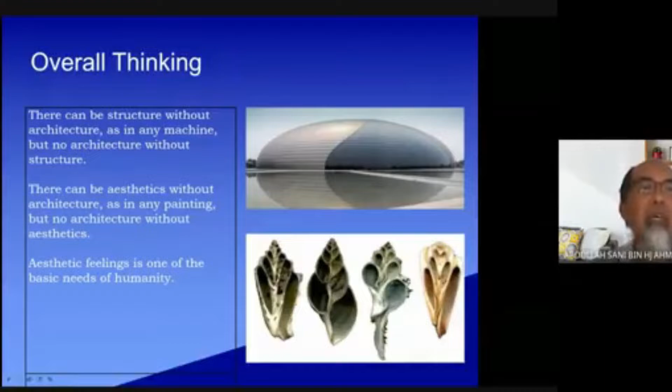So there can be aesthetic without architecture. As in many paintings, there is a lot of aesthetic in it, but no architecture. We see beautiful things, aesthetic things in plants, in views. Okay, those are beautiful things, those are aesthetic, but there is no architecture.

Aesthetic feeling is one of the basic needs of humanity. So in architecture, one of the things we have to have in mind is aesthetic. And structure is part of architecture. We cannot neglect structure because, as I said earlier, without structure, a building cannot stand. And when we design, we have to think about the structure.

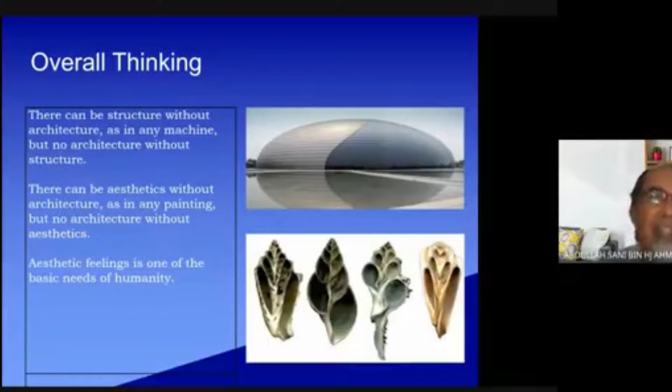So when architecture incorporates structure in our building, we have to incorporate not only structure, we have to incorporate beauty, we have to incorporate aesthetic, something that is beautiful. So I hope students can understand the overall thinking about structure in architecture - it's not just structure, but it's more than that. Okay, next please.

Okay, when we use structure for architecture, basically the structure can be divided into 2 components - this is just to recap the whole concept of structure. There are 2 types of structure: one is load-bearing structure, the other one is skeleton structure. Okay students, you have to remember these 2 types of structure.

What is load-bearing structure? Load-bearing structure is basically when we put material on top of each other without any frame inside it. So from the slide here, you can see how termites build their nest from mud - they just build on top of each other. Okay, you see the Prambanan architecture in Jogja, the one on the top right hand picture.

That is Prambanan. If you remember, Borobudur is also load-bearing structure. Load-bearing structure is when you place material at the bottom and then stack it up to the top. Different from RC frame structure, where there is reinforcement inside the structure. Load-bearing uses the material itself as its structure. Okay, this is load-bearing structure.

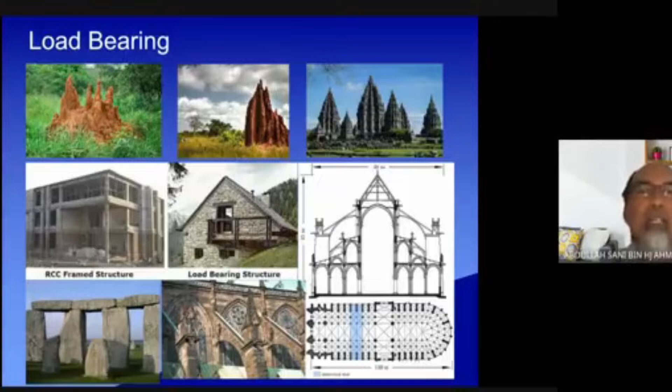Next slide please. Okay, another example of load-bearing structures from previous architects, great ancient buildings - you can see the Colosseum here. These are all great examples of load-bearing structure. I think the most famous one until now is the pyramid, which is load-bearing structure.

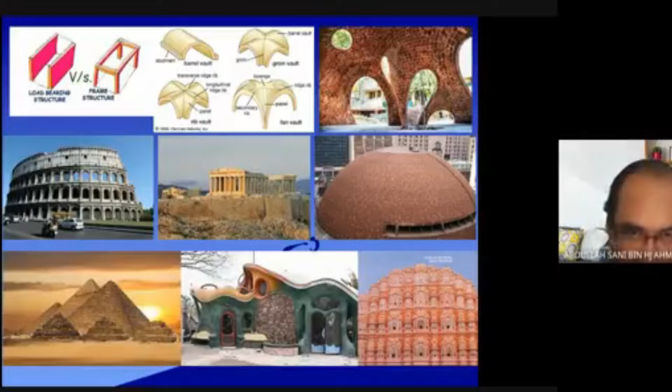Also, in recent buildings, you can find many still using load-bearing structure. As I said just now, in load-bearing structure, if you push the material, you cannot see anything inside - it's just the material on top of each other. What I mean is there's no reinforcement inside. They just use the weight of the material to make the structure.

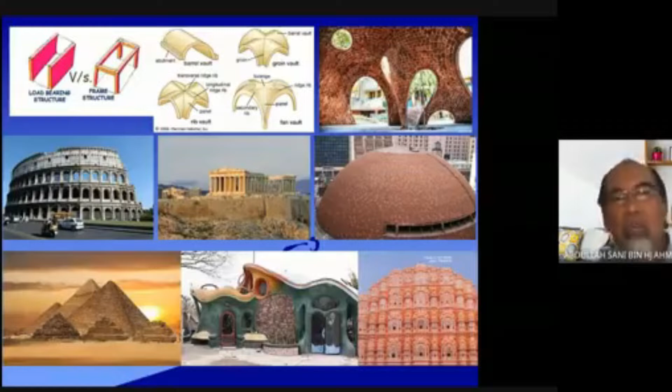Okay, there are many forms. Actually, if you are creative, you can make curvilinear shapes, you can make a dome, you can make fancy shapes of architecture, like for example barrel vault, dome, pyramid, and curvilinear forms. So actually, load-bearing - we mustn't say it limits our creativity, because if you have ideas, you can do many kinds of architecture. Next, please.

Okay, that one is load-bearing architecture and load-bearing structure. The next one is a skeleton structure, or in other words, post and beam structure.

Post and beam structure can be found early in timber building. It's very easy to understand: we just put two posts, and on top of the posts there is a beam. That is what we call post and beam.

If you have a lot of these frames, post and beam, for the entire building, we can call it skeleton structure. There are many examples in the world, in Malaysia as well. If you go to Sri Menanti, you can see the 4-story Istana Sri Menanti using post and beam timber structure. If you go to Kuala Kangsar, the Istana was also built using skeleton structure.

If you go to Scandinavia, there are a lot of houses using timber or skeleton structure. In London, there is one famous commercial building, more than 5 stories, situated near Oxford Street. They call it the Liberty Building. The entire building was made using timber skeletal structure.

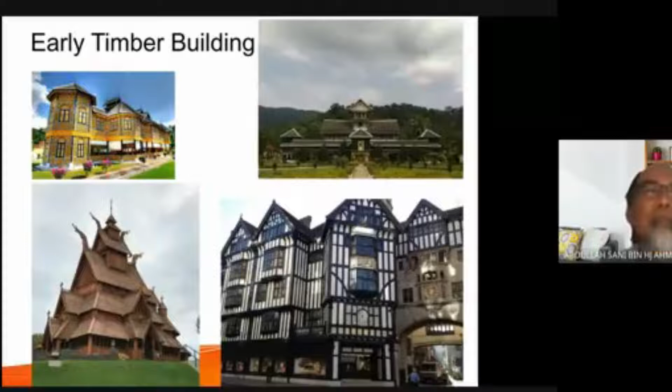Next, please. Okay, this is quite modern. As I said, an architect should have creativity, should innovate the understanding of structure, either load bearing or skeleton. These are some examples of skeleton structure for contemporary architecture.

You can find a lot on the internet, whether it is a proposal or a real building. The one that I showed here is a real building. So I think by now you can appreciate what skeleton structure is, and what load-bearing structure is.

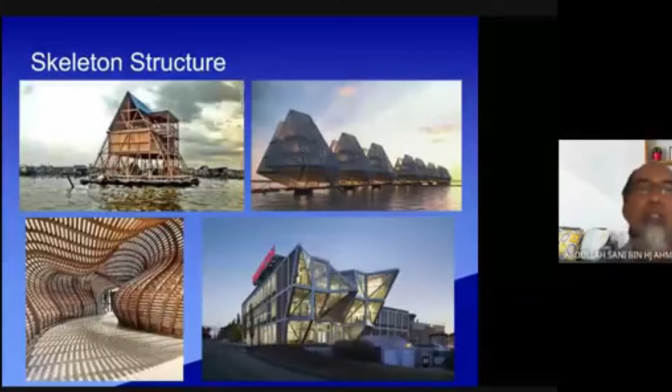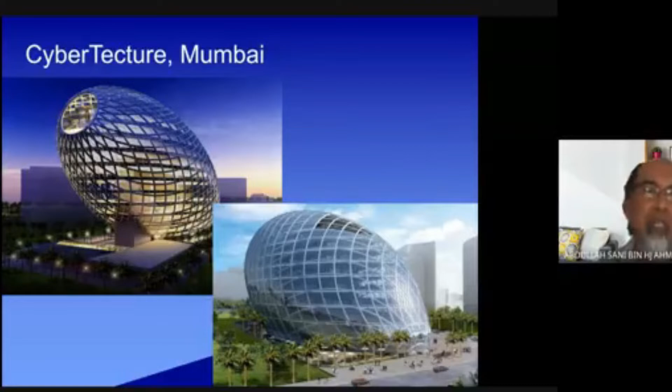Another example, but this is not from timber, this is from steel: the CyberTecture in Mumbai. I think if I ask students what kind of structure they use, straight away you'd say this is skeleton structure. This is not load bearing.

Okay, come to this topic today, the expressive structures. My dear students, as I said, if you know the concept of structure and you want to integrate it in your architecture, you mustn't let the structure just serve its function.

That is to support the floor, to span a distance, maybe to protect from the environment. I think you have to go more than that. You have to use structure as architecture, and you can express the structure. So here are some examples of structure whereby they express in terms of beauty.

One example that people know is the Bird's Nest Stadium, opened in 2008 during the Olympics. You can see they depict the bird's nest and use it as a stadium. And the Golden Gate Bridge in San Francisco is one of the landmarks in the US. It's a nice bridge, not only to span a river, but also as a landmark.

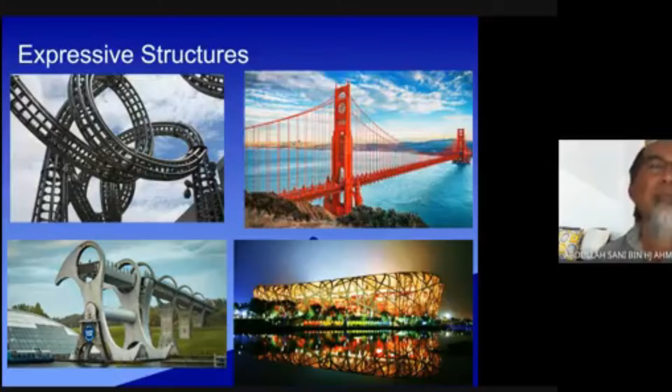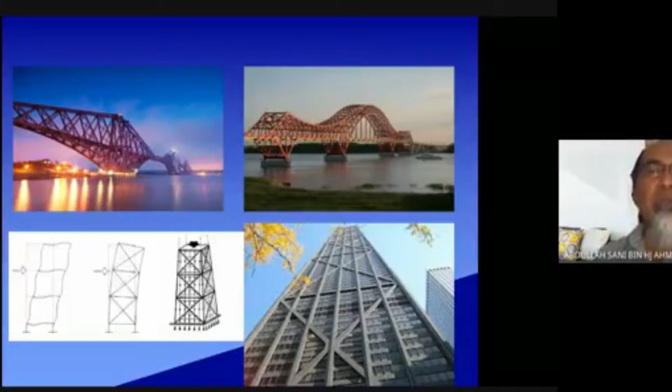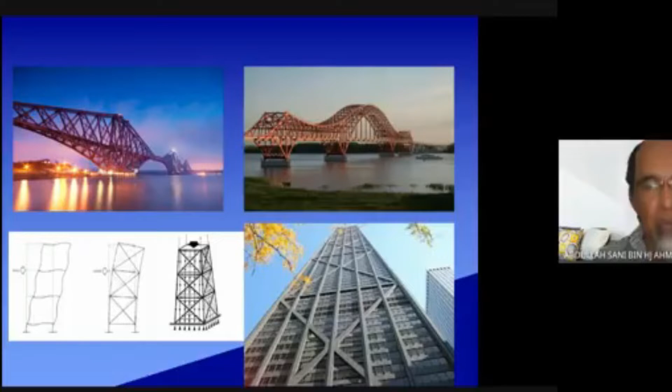Okay, next please. Another example of how you use the structure to express your idea. So whether it is a bridge, a building, a tower, a reservoir, a retaining wall, any structure actually, if you incorporate aesthetic, it becomes more expressive.

I think everyone has stopped by at the R&R Ayer Keroh or Sungai Buloh. There is a bridge connecting to the other R&R. The connecting bridge is just a bridge, and inside the bridge, inside the Warren truss or whatever truss, they use the space for a restaurant.

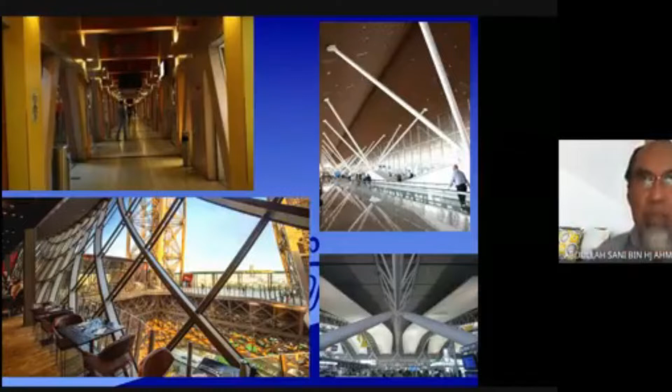So you have to remember, whether it is a column, a beam, or roof trusses, actually within the column, within the beam, within the trusses, there is space inside it, and you can use the space, exaggerate it by looking at the structure, and it becomes more meaningful. Okay, here are some examples.

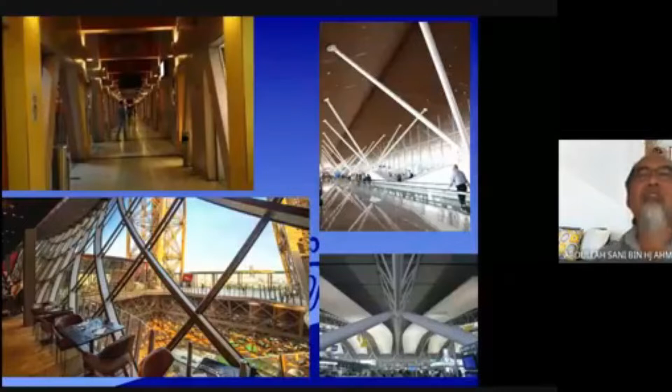What I mean by, you can use the space inside the structures.

My dear student, if you want to grasp the whole idea of structures, there are two components: vertical structure and horizontal structure. Vertical structures are normally columns, horizontal structures are normally beams or floors. In between them are diagonal structures. If a diagonal structure is more than 45 degrees, it becomes a vertical structure; if less, it becomes more like a horizontal structure. So if you want to remember, structure has only two components: vertical and horizontal.

Okay, this is for skeleton structure. But for load bearing structure, this idea doesn't apply.

So Frank Gehry, for the Bilbao building, used this idea of vertical and horizontal structure to make the building not ordinary, because he understood that structure is not only vertical or horizontal, but you can use diagonal structure as well. If you use all three components of structure, it becomes different from ordinary structure, and it is more expressive.

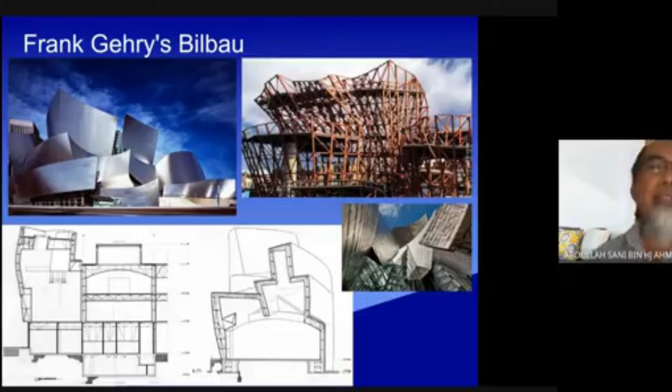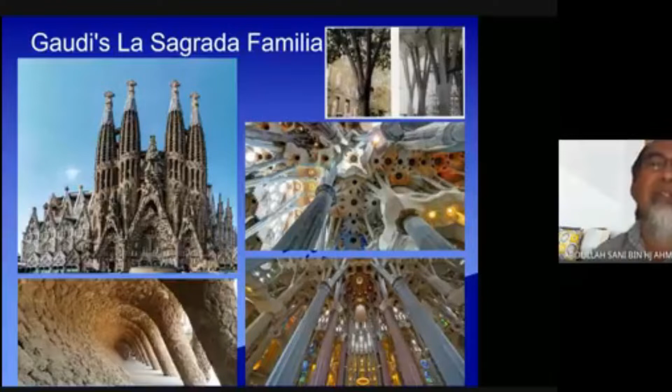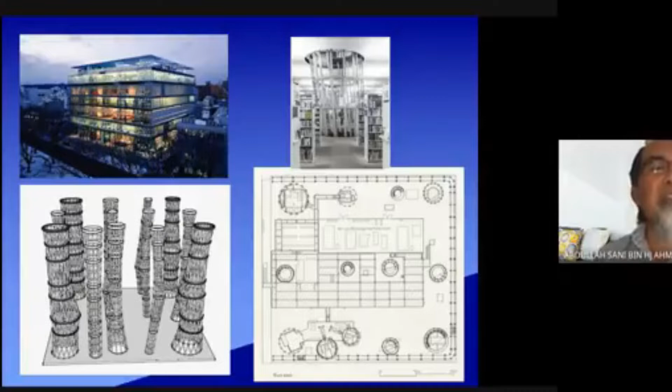From that idea, you can see that the column is not necessarily solid. You can expose the column to become a character of the building, or use the hollow section within the column to integrate with services - you can put a lift inside it, a staircase, and many other service functions. So you can integrate services together with your structure, and integrate aesthetics together with the vertical structure. This is applied in Sendai Library in Japan.

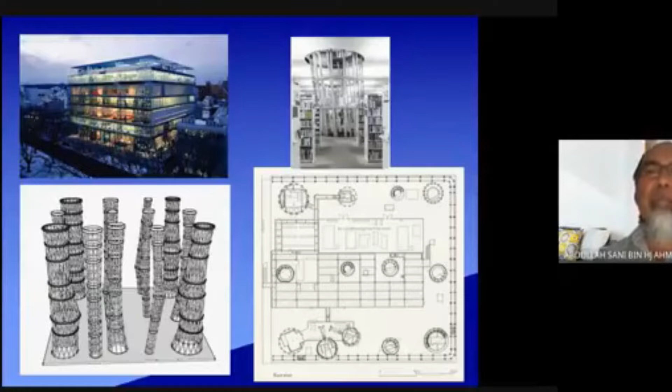Next, this is how the concept of the building looks like. Can you see this? The column is a skeleton column, not a solid column. And also the floor is just like a waffle floor, so that it is lighter, not solid.

The column is not solid, even the floor is not solid as well. This is so that the building can go higher with less weight supported by the column.

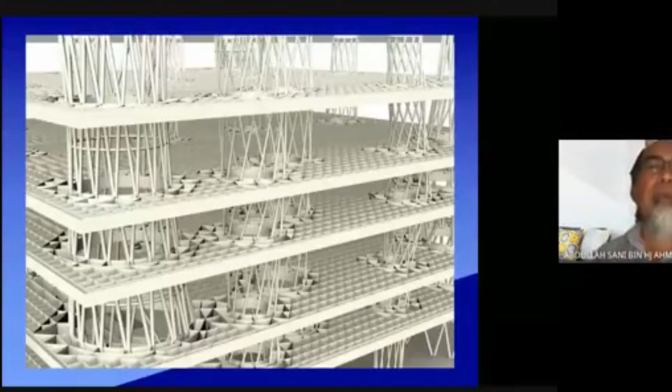From different analysis, because the architect used computer experiments to test the idea, I think the idea works, and the building in Sendai, you can see it works nicely.

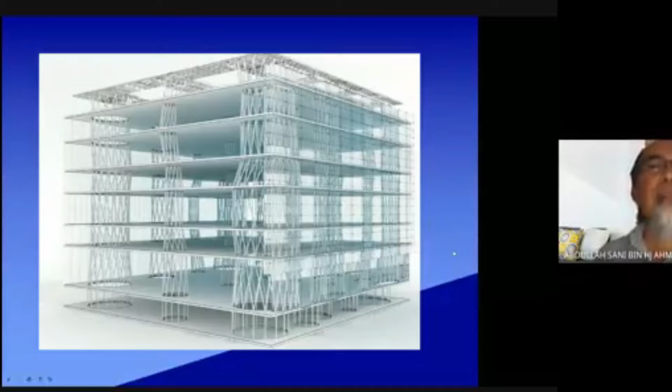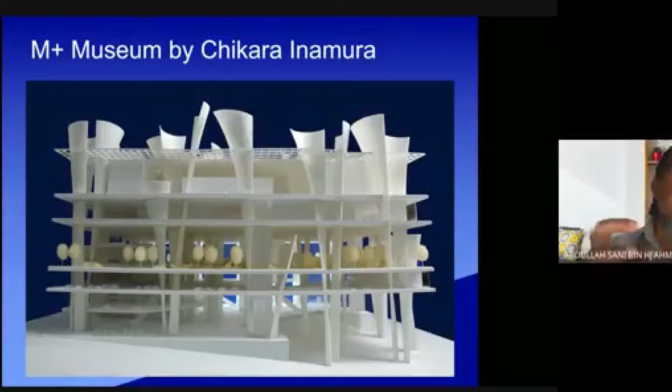I'm not very sure about this one, whether it has been built or is still an idea, but from the Sendai architecture just now, this has the same idea. Can you see the column - instead of a skeleton column, this one uses a folded column.

Folded column to support all the floors, and it becomes nice - another piece of architecture. So again, my dear student, you can express the column in many ways. In the past, Roman architecture used Doric and Corinthian columns, but now if you understand more than that, you can use skeleton columns, folded columns like this one, and many others, or you can even use a branch. Later I will show some examples to represent and express the column, not only as a solid column.

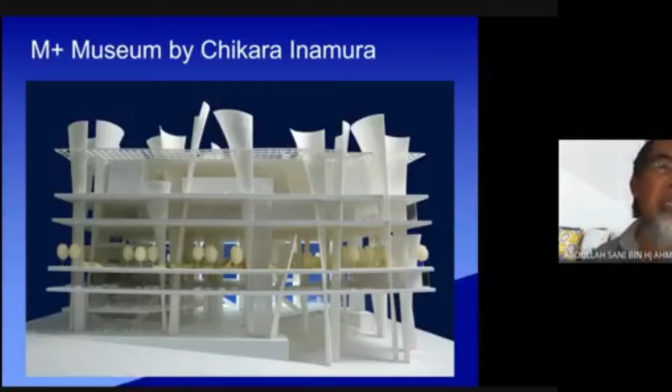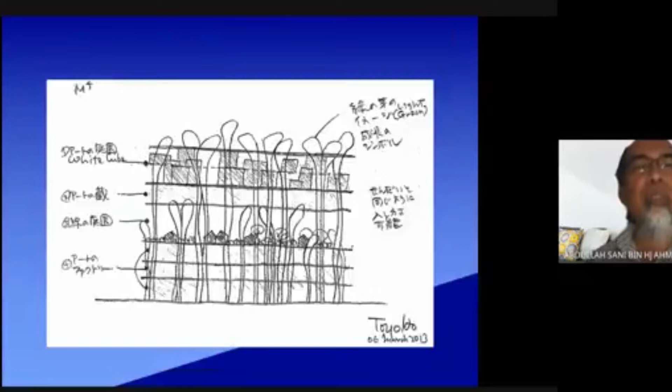Okay, this is just the sketch, the initial idea, how the whole concept of the building wants to be built. Okay, just the column, nice column, and then they put the horizontal things. Okay, next, please.

Okay, nowadays we have a lot of computer applications available. We can sit together with the computer engineer, or we can sit together with the engineer to build our architecture. And can you see, if we can reduce the solidness of the column, actually we can reduce the weight of the building. And if we reduce the weight of the building, actually we save some cost of the building, as well as when we reduce the weight of the building, the building can go higher. So there are many advantages of reducing the weight.

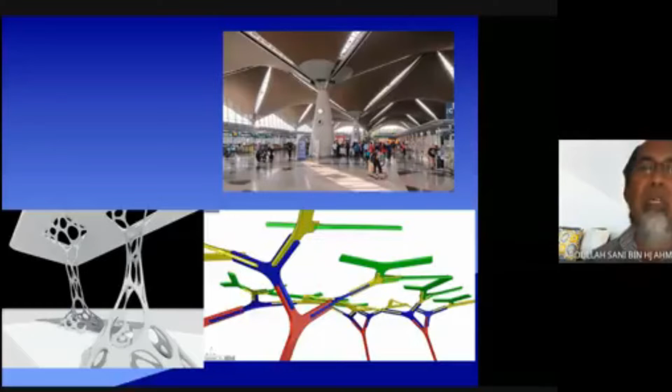Okay, that's why nowadays there are many crazy ideas, expressive structures around, because of the availability of computer applications. Next. Okay, this is what I mean. Zaha Hadid used a lot of computer applications to realize her idea.

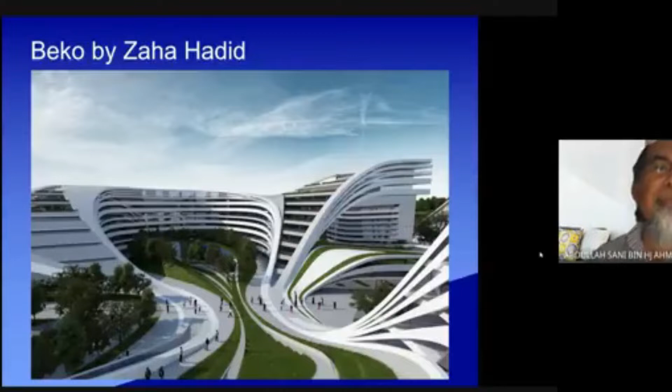Okay, next. Another expressive structure by Zaha Hadid from a different building. She expresses bukan setakat vertical and horizontal, tapi combine between the two lah. Next, please.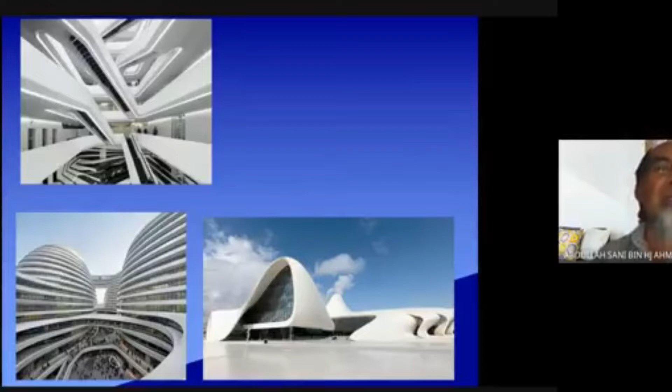Okay, this one. I think if you have time, if students are interested to know about this verticality and horizontality, where there's no differentiation between horizontal or vertical, you can study Zaha Hadid, because Zaha Hadid likes to use lines in her architecture. So she applies structure into architecture, not architecture into structure.

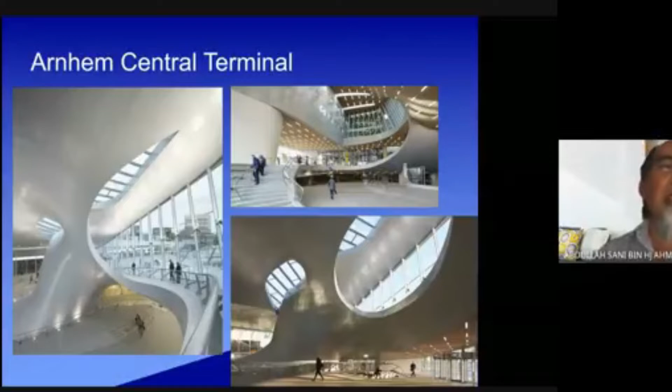Okay, from this understanding, you can apply to terminal, you can apply to museum, you can even apply to a small building or a shelter, bus stand, and many more. Okay, next please.

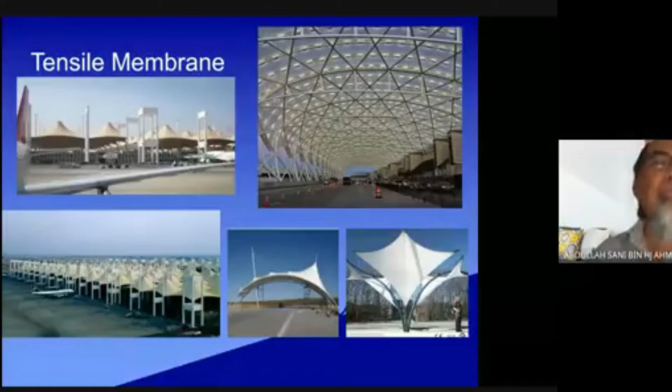Okay, another great architect that likes to express structure, I think you can use as a reference, is Santiago Calatrava. Santiago Calatrava is a person yang seangkatan dengan Richard Rogers, Norman Foster, semua lah. So he expressed the structures. Like for example, if he wants to use a column, he tries to elaborate the column. If he designs a bridge, he makes sure the bridge looks nice and becomes iconic to that place, becomes a landmark to that place.

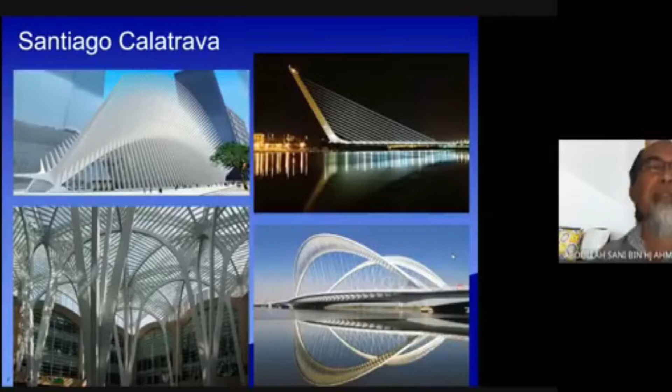And I tell you, student, if you incorporate the aesthetic into architecture, your architecture becomes more meaningful. Okay, next please. All right, these are a few more examples of expressive structure, whether you want to design a pedestrian bridge, or a multi-purpose hall, terminal, mosque, and many more.

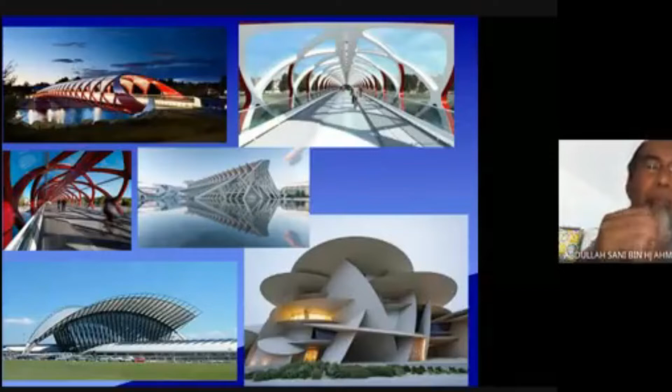Actually, if you have an idea, you can express the structure that you use. So again, my dear student, I don't want you to design only space, nice form, but neglect the component of structure whereby you can express it at the same time. And again, when you design architecture, when you design a building, the building comes together with structure, with interior, with landscape. So if you have time, please produce your architecture as a package, not just a space and form, and you forgot about how to express the structure.

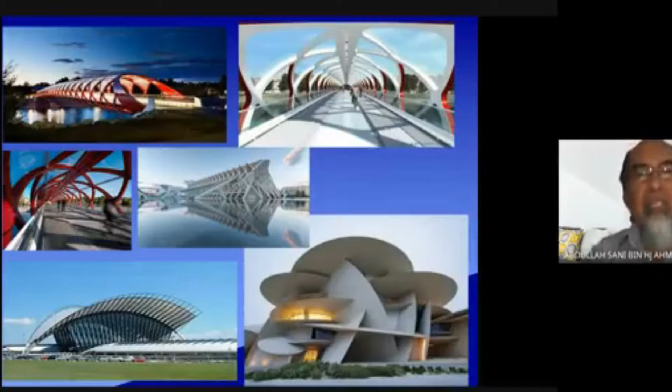And also you forgot to put some nice element of landscape, especially in front of the building, as well as the interior, maybe the lobby, maybe the living room, put some nice interior architecture in it. If you combine all these things, architecture, landscape, interior, I believe your architecture has more meaning, has more quality, and you understand the whole architecture. Because architecture is everything. Everything is architecture. Next, please.

Okay, this one is still in progress, not built yet. Mumbai Convention Center. Can you see here? Where is the column? You can't see the column. Where is the floor? You can't see the floor. But they combine the whole thing, and it becomes something where people come and see, wow, what a nice venture, what a nice attempt. So architects always create something new. If you just build an ordinary building, then you become an ordinary person. Okay, next please.

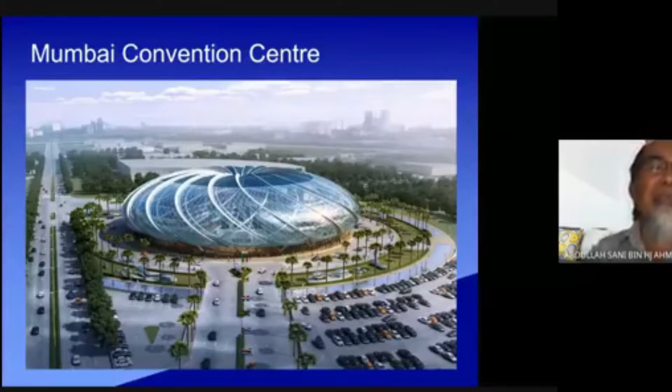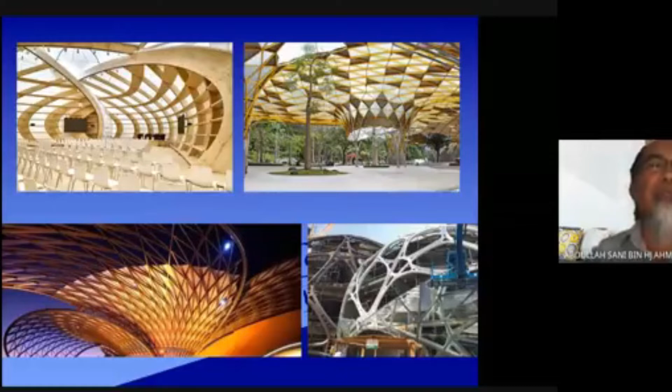Okay, this is curvilinear structure. You can use a skeleton to make curvilinear structure. So you can use timber, you can use steel, you can use composite to make the curvilinear structure. And curvilinear structure is very expressive and very nice. Okay, next.

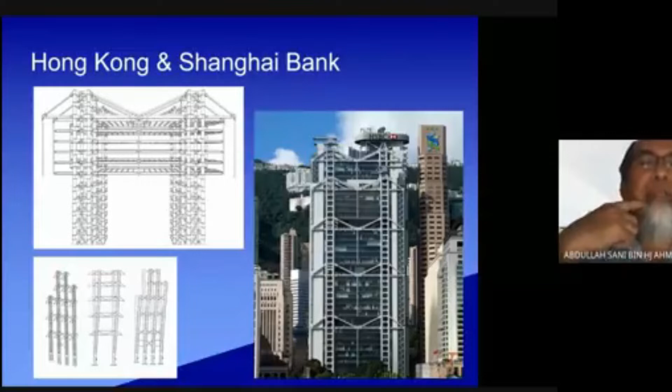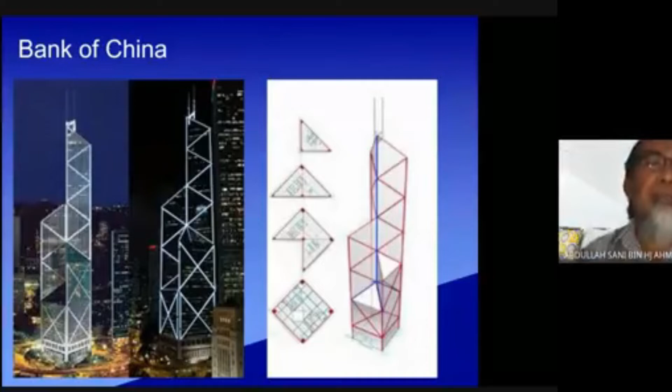Okay, this is another bank, Bank of China. This one is in Hong Kong. This one is very simple. They use triangle space frame, and in between they put the component, and it becomes a tower. But why I want to show this one is the concept of frame structure. You can use that as part of your entire building structure. Okay, next please.

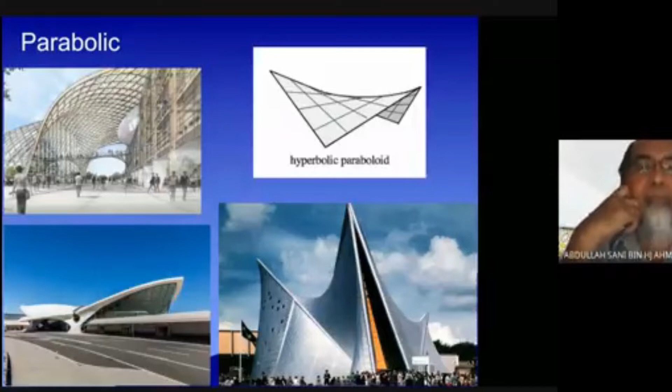Another type of structure that you can apply to architecture is hyperbolic paraboloid. What is parabolic structure? Parabolic structure is using the form of the building to strengthen the building, using curves. Hyperbolic paraboloid is two curves together in one building. One is curving downward, the other is curving upward. Combined together, they become a strong piece of structure. Okay, you can explore this one.

Last but not least, this one is not yet explored by architects, but it has been built in certain areas in Europe or the US. They use the pneumatic concept. Pneumatic is pumping air into Teflon or certain materials, and when we pump the air it becomes lighter and goes up, and it creates the form that we want to use for the architecture. The Zeppelin, using hot air, can fly. It is the earlier type of form using pneumatic structure.

So actually, pneumatic is a kind of structure that is yet to be explored further. I think the idea should be stronger, because if you see the tires of vehicles, lorry, car, aeroplane, the tires that support the vehicles are pneumatic. If the tire can support a lorry, an aeroplane, heavy machines, then it can be used for building structure. Okay, so that is the whole idea.

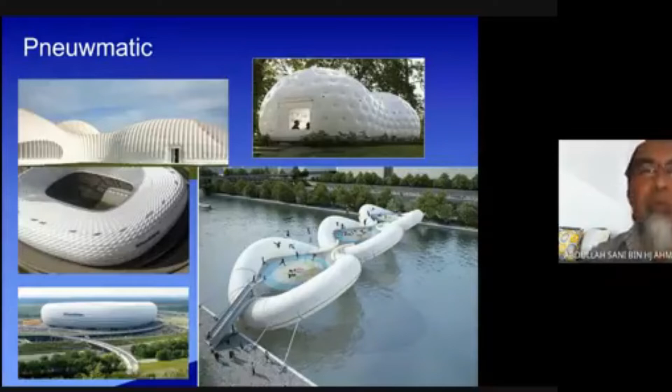Another kind of structure that hasn't been explored yet by engineers is using magnets. If you want to have a floating building, you can have a floating building on water, or in the air by using magnets. Some experiments have used this idea, but I'm not very sure whether it was later transformed into building usage or not. Okay, I think that is all I want to present today.

If I can recap, structure is part of architecture, and students have to use their understanding of structure and express it in terms of architecture. Don't leave the structure just like that. When the structure is part of the architecture, try to express it, because the cost of the structure in a building is quite expensive. It is about a quarter of your entire building.

If your building costs 4 million, for example, the cost of the structure is about 1 million. So don't just spend 1 million and not see it, because the structure is in the form of columns and foundations underground that we cannot see. We can't see it, so we hide it. Columns too, we seal them as part of the wall, and hide them. It's a loss, because we spent 1 million on the structure and yet we cannot see it.

So that is the whole thing I want to deliver today. Hopefully you get the idea: express your structure. If not for the entire building, at least in front of the building as a welcoming feature. But if you can incorporate it in the entire building, it's much better. Okay, I think that is all. I am open to any questions. I think the students should have some questions.